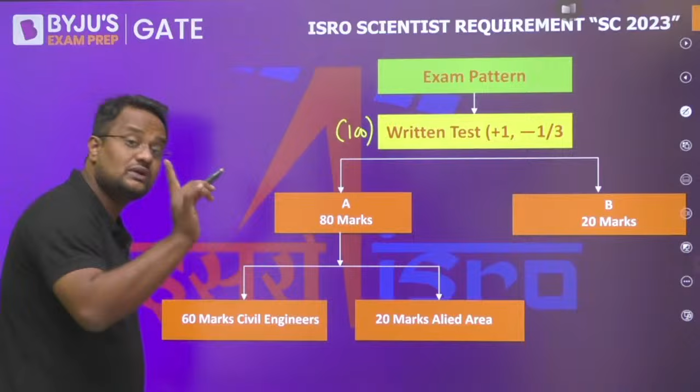Many students are having a doubt - they have asked me in the comment section also. I have replied that maths will also be here. Engineering maths will also be there. That is 75% of 80, which is 60 marks, and 20 marks will be allied - allied means related to civil engineering. So 80 will be distributed as 60 plus 20. This is section A. Then section B will be 20 marks - that will be reasoning, aptitude, logical reasoning, all these questions. You have to individually clear the two sections. Individual cutoff is also there, that is written in the notification.

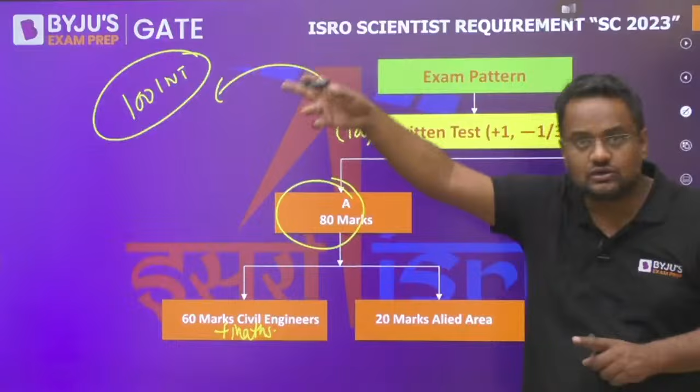After this written exam, there will be a 100 marks interview. Some students will go to the interview - for one seat, approximately 10 to 12 students. Now the final cutoff - this is not like BARC. In BARC, this is just a qualifying exam and all selection is done on interview. Here, after the written test, some students will be selected for interview. While making the merit, there's an individual cutoff for Part A and Part B as written in the notification. For the final selection also, the individual cutoff of written test and interview is there. 50% weightage of written and 50% interview will be taken, plus 1 minus 1 by 3.

Now if I tell you about these 80 marks - out of the previous year questions, not these 80 marks, because the previous year the pattern was a bit different. Previously, don't consider these 80 marks here, because earlier the pattern was different. You can see the distribution of subjects, just see the ratio.

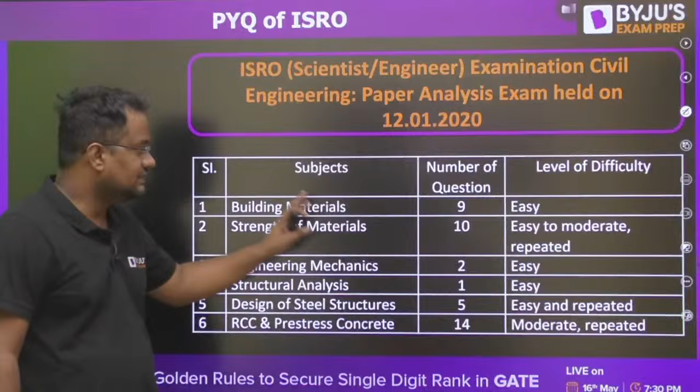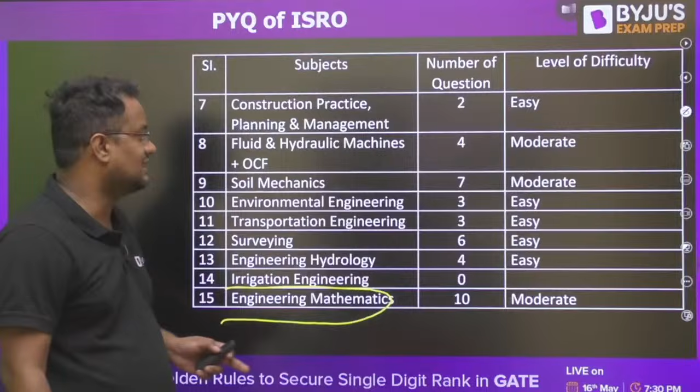Okay, no Saksham, right now there is no test series, but engineering services will be quite relatable to that. So this is the ratio. Strength of material, RCC and pre-stress are asked in high weightage. Now guys, soil mechanics also has decent weightage, environment less weightage here. Engineering mathematics again. So you can see that strength of material, RCC, these structure subjects are having a little bit more weightage, and soil mechanics.

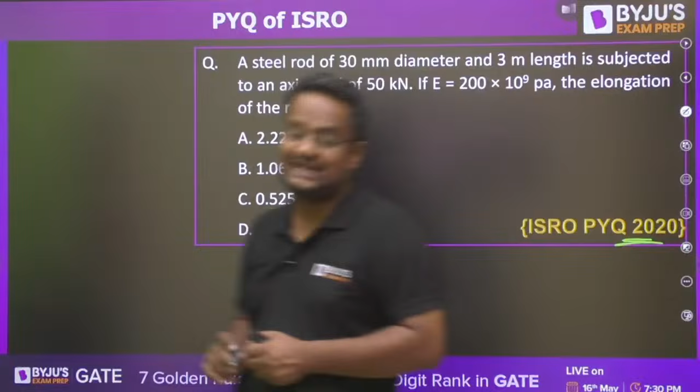Now let us go to the question, guys. ISRO previous year questions 2020 and 2018 we will be doing today.

Okay, Ambati, kaise ho? Every time in the session you say this, na? So quickly tell me the answer in the comment box, guys.

This is question number 1. PYQ of ISRO SOM. This is for civil and mechanical both. Strength of materials. Tell me in the comment box, everyone. Come on, yaar. Macha do, bhai. Easy questions are there, yaar.

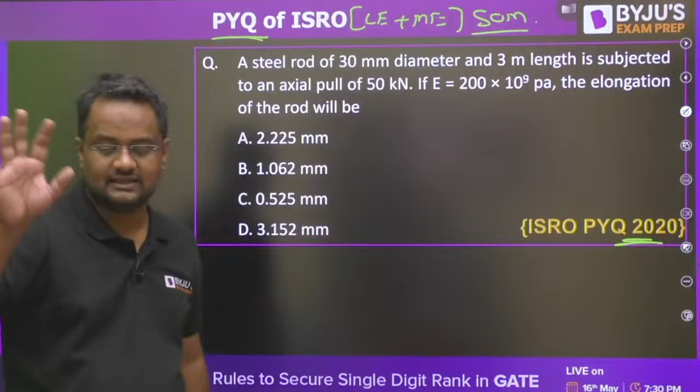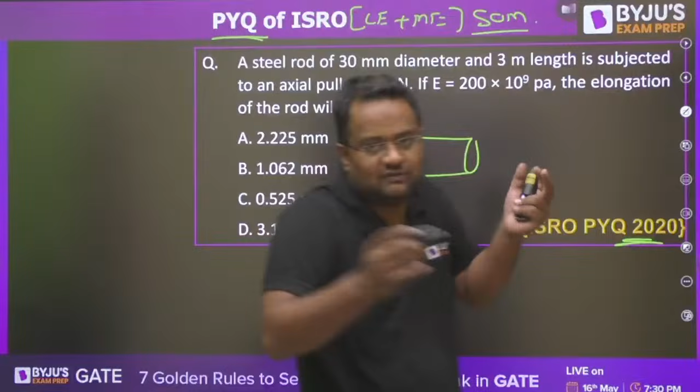I told you the level of the question is much lesser than the GATE exam. Vinay, please take your calculators also. So steel rod, very simple. Now you cannot say that we are doing very easy questions, guys. Whatever PYQs are there, we will be doing. We just want to tell you the level of the exam.

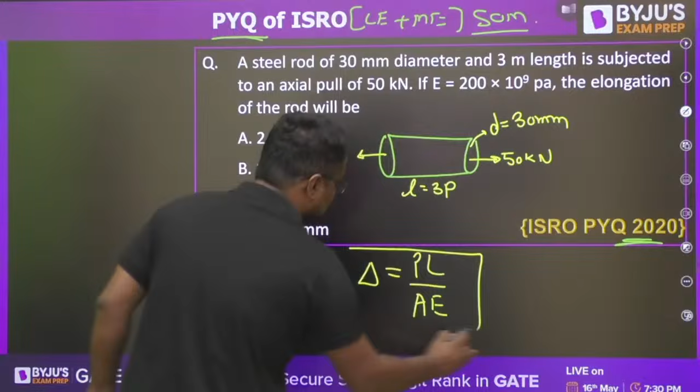30 mm diameter, 3 meter length. The diameter is 30 mm and length is equal to 3 meter. An axial pull of 50 kilonewton is there. Young's modulus is given. So delta is equal to PL by AE. Force, length, A and E, everything is given. So 1.062 will be the answer. These kinds of questions are asked in ISRO, and the same level is expected in the state service examinations. Okay, now moving to question number 2.

The shape of the bending moment diagram over the length of the beam carrying a uniformly increasing load is always? What is uniformly increasing load? Tell me, yaar.

Yes, Vinod. ISRO exam most probably will be offline. Tell me.

Uniformly increasing means, whatever the beam is, it's not given, simply supported or cantilever, I don't know. Increasing uniformly, that means linear. Otherwise the increase can be parabolic also. Now if the loading diagram is of n degree, then the SFD will be n plus 1 and the BMD will be n plus 2.

How do we know this? Because the bending moment slope is shear force, V. So after differentiation, degree is reduced by 1. X cube differentiated is 3x square. So if this is n plus 2, this will be n plus 1. And shear force differentiated is load intensity. So this is n plus 1; differentiating, it will be 1 less.

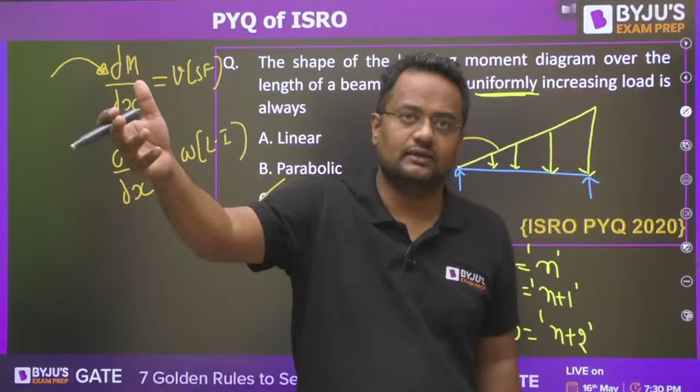Now I am again saying, guys, the level of ISRO PYQs is much lesser than GATE. It is up to ESE objective and SSC exams. Now tell me, Hooke's law is valid up to? Everyone.

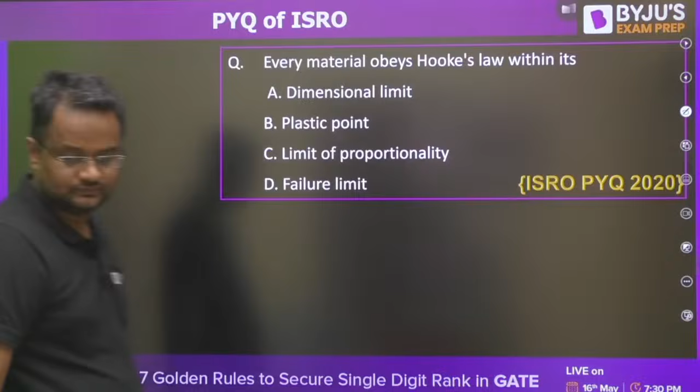It is up to the limit of proportionality. Okay, Hooke's law is sigma is proportional to strain, so sigma is equal to E epsilon, like this. Now this is y-axis stress, this is some constant m, this is x. So Hooke's law is suggesting a linear relationship, and linear is only up to the proportional limit.

Hooke's law is this: y is equal to some m into x, not sigma square, not epsilon cube. So Hooke's law is suggesting a proportional thing, that is up to the linear limit. "But elastic limit is the appropriate option, sir, I think."

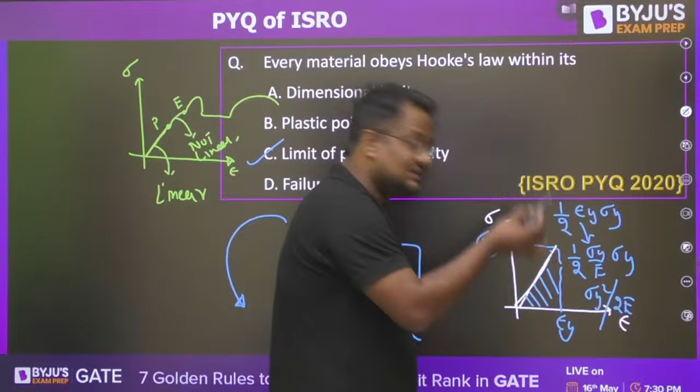So we do this. Otherwise, up to elastic limit, if we are finding the area, this is not sigma y, this will be something else. Hooke's law will not be valid. Epsilon y you can't write as sigma y by E, but that is just an assumption. Okay? Got it?

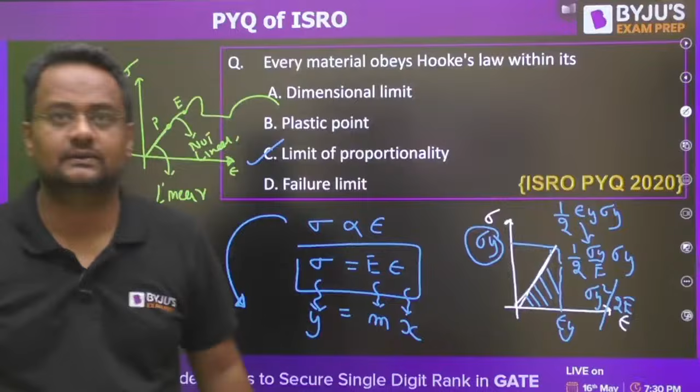Okay. Now next question. The unit of moment of inertia of an area is? Let me check who can give it faster. Okay, everyone, every commando, every champion, come on. Everyone's answer I want. Great.

So guys, I is equal to BD cube by 12 or pi d4 by 64. All these are dimension to the power 4, meter to the power 4. Okay, yes. Do this now.

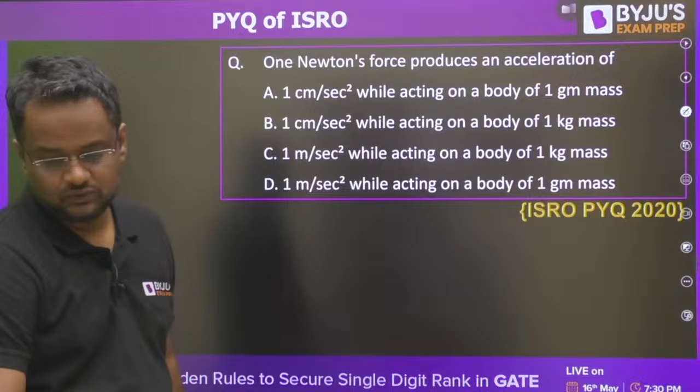1 Newton, guys, force is equal to mass into acceleration. Force is equal to mass into acceleration, and this is an SI unit, Newton. So this should also be SI. Mass will be SI unit kg. Acceleration will be meter per second square. So 1 Newton is 1 kg into 1 meter per second square. Okay, like this.

Okay, guys, can you please write down your cities, in which city you are right now? I'm right now in Delhi. I'm basically from Uttarakhand. My hometown is Uttarakhand, but right now I'm in Delhi. Can you all write down? We all are meeting on a beautiful Sunday morning.

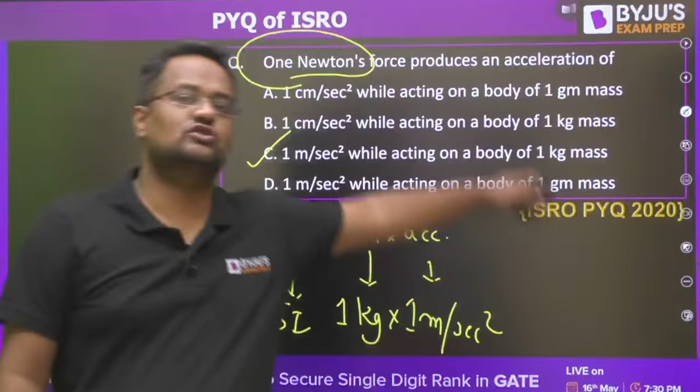We'll be devoting some time to the ISRO PYQs of SOM. This is for civil and mechanical both. Right now, these are the PYQs of civil, but it is equally important for mechanical as well.

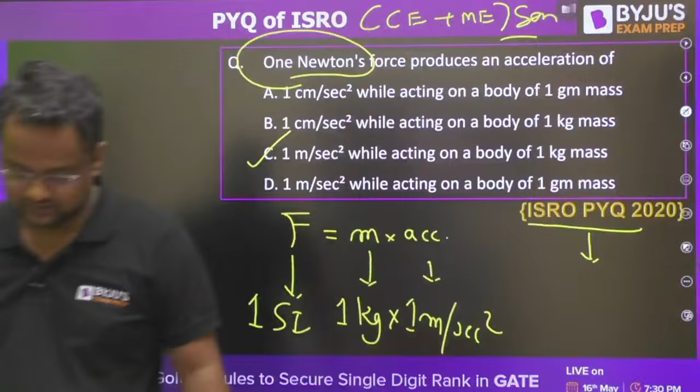Telangana, Andhra Pradesh, Telangana, okay. Karnataka. So in Karnataka Congress has won, huh? Swati, Congress won there with a very good number of seats, although the vote percentage of BJP increased.

Kadapa. What is Kadapa, yaar? Kadapa is some name of any chief minister or the potential candidate for chief minister. Okay, Kadappa. Kadappa is also that in Bahubali also, na? Someone is Kadappa. I have not seen the movie. Okay, I don't watch movies.

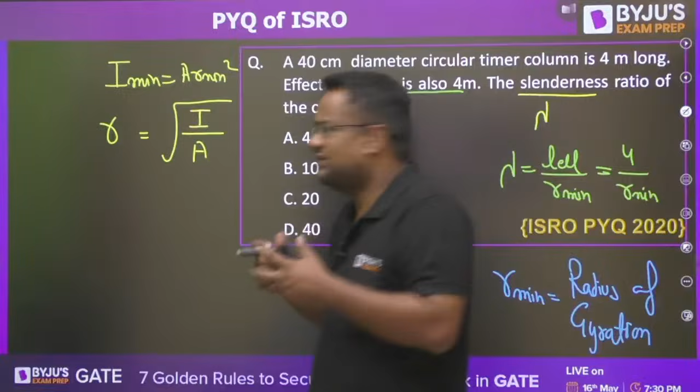What is the physical meaning of radius of gyration and lambda? We all know this formula. If lambda is more, that column will be long, and a long column is more liable for buckling failure. Lambda more means buckling failure more. Short column means crushing. Short column will not buckle like this; it will more probably be crushed. Long column may buckle. So lambda signifies the failure of an object. Usually for steel, if lambda is more than 88, in the range of 100, 120, 140, the site engineer understands there is a chance of buckling failure.

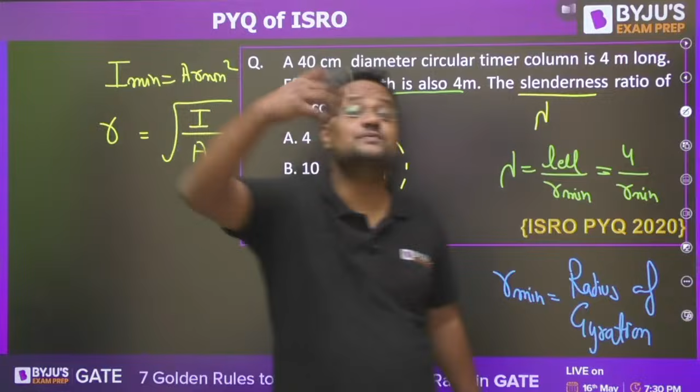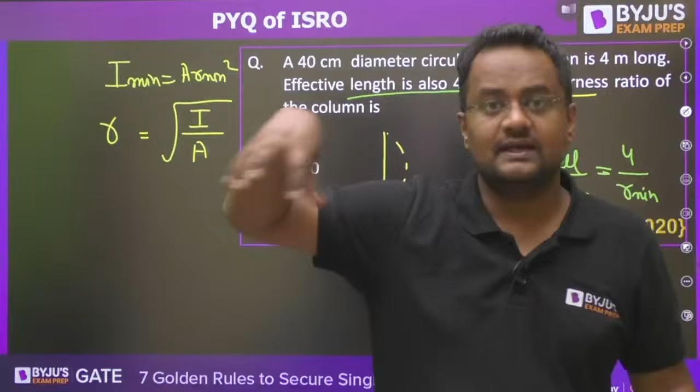What is the physical meaning of R? Here R depends only on shape, I and A, not material. If R of a particular shape is more, it provides more moment of inertia for a particular area. Suppose this is the area. From this much sheet, I can make an I section, a circular section, or a rectangular section. From all those sections, where R is more, it provides greater moment of inertia for the same area. So R more means more strong.

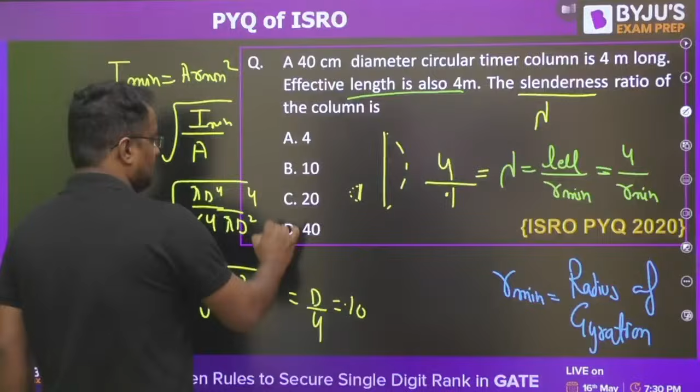Okay, so what is I here? Diameter. It is circular, so I will be the same about all axes. About the central axis, it is pi d^4 by 64, and area is pi d^2 by 4. So pi cancels, R is under root d^2 by 16, so it is d by 4. Diameter is 40 centimeter, so this is 10 centimeter, which means 0.1 meter. L is 4 meter, so 4 by 0.1, this will be 40. Have you got it? Everyone, please let me know.

SOM PYQ we are doing, guys, for both civil and mechanical. Okay. Let us go further now.

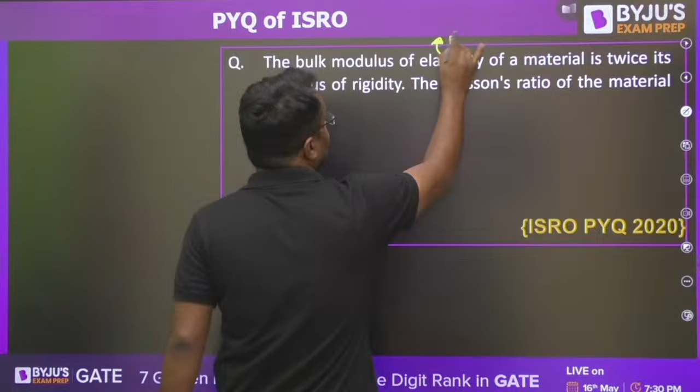The bulk modulus of elasticity, K, is twice the modulus of rigidity, which I am representing as G. Somebody represents it with other notations also. So modulus of elasticity is twice its modulus of rigidity: K is equal to 2G. This is given. Okay, Anwar, we'll do that, don't worry. K is equal to 2G.

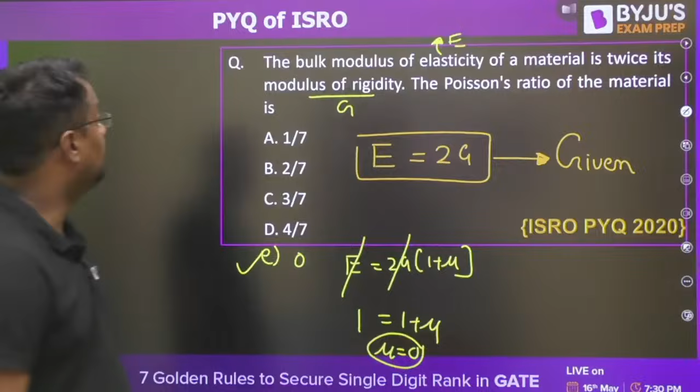Poisson ratio of the material: E is equal to 2G(1 plus mu). This is the relationship. But E is itself 2G, so 1 is equal to 1 plus mu, so mu is equal to 0. No option. Okay, sorry, bulk modulus of elasticity. We have done this mistake. This is bulk modulus here, K. So actually we have done two questions here. So this is K.

Okay. So relation between K and G is, see, E, Young's modulus, is equal to 3K(1 minus 2 mu), correct? Okay, and K and G also have some relation, na? Mu is equal to, I guess, what was the relation? I forgot. 3K minus 2G upon 6K plus 2G. This was the relation. Check this.

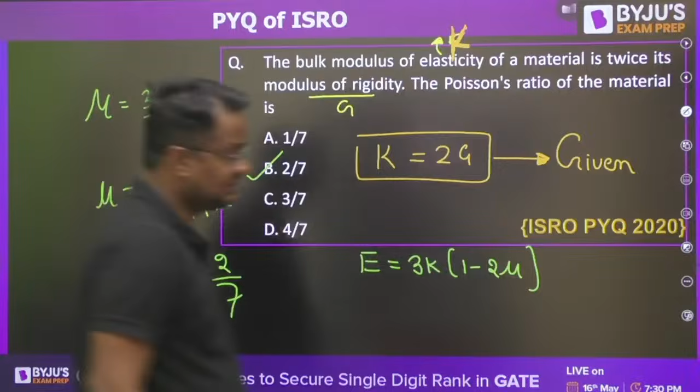The bulk modulus of elasticity, check this. Is this fine? The bulk modulus K is equal to 2G. If this is fine. Okay, I will not remember the formulas na. 3K minus 2G, 2G is K itself, upon 6K plus K. So mu is equal to 2 by 7. This is B option. Please check. Okay. So this is not required here.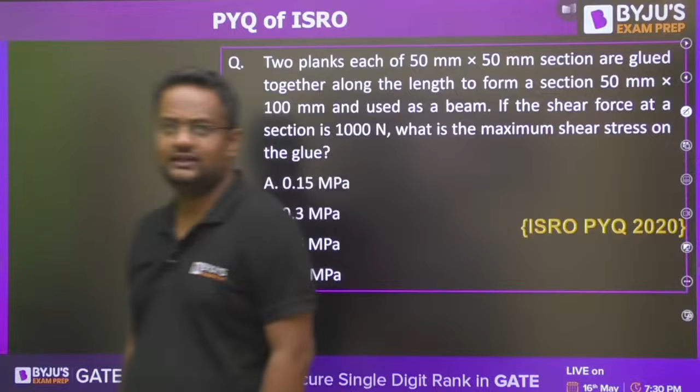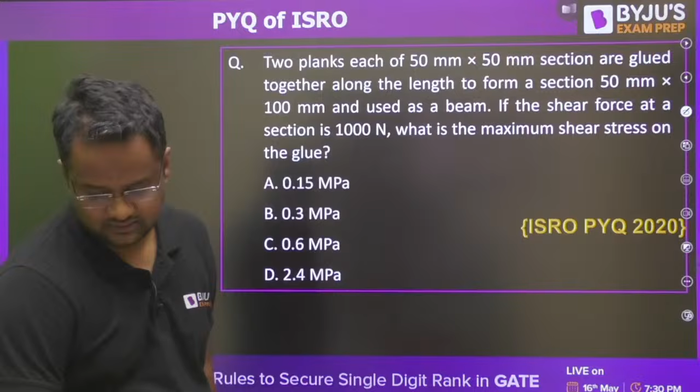Let us do the next question. Let me check which student can do it fastest from which city. Tell me. Everyone out there. Which city will be giving the fastest answer? Let me check. Keep sharing, guys.

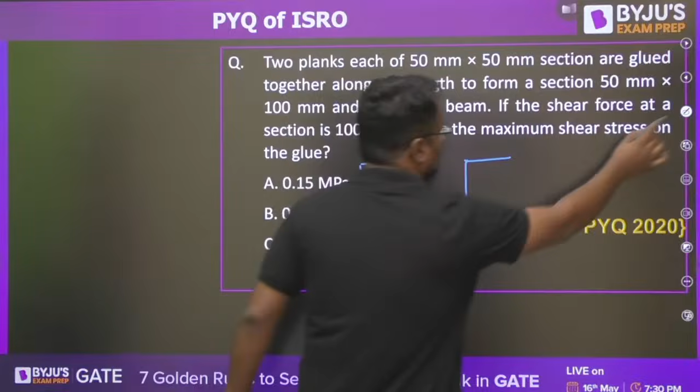2 planks, each of 50 into 50. This is 50 into 50. Nice question. And one is also 50 into 50. Now they are joined by a glue. They come closer to each other and are joined by glue. Fevicol. So now they become a single assembly, like this. Now, they have not asked maximum shear stress. They asked maximum shear stress on the glue.

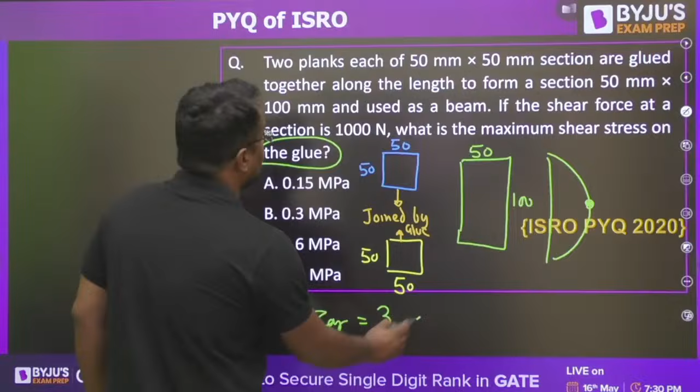So here the maximum shear stress occurs at the center, na? And this glue will also be at the center, such that these dimensions are joined in such a way. So tau max is equal to 3 by 2 tau average, because the glue itself is in the location of maximum shear stress. So 3 by 2 tau average, where did it go? 1000 by area. Area is 5000. Oh, very easy question. And the answer will be 0.3 megapascal.

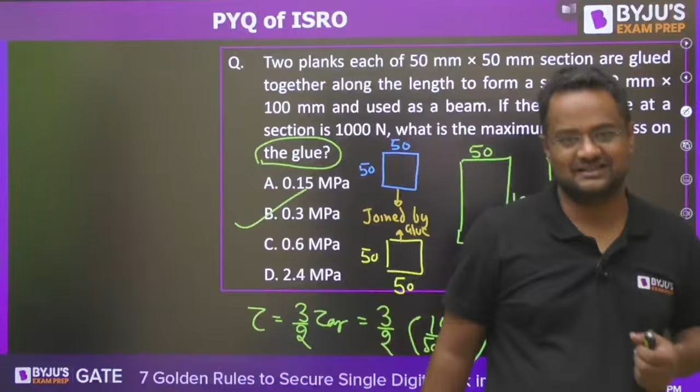Okay. Anubhav Singh, the name itself suggests someone who clears the civil service examination. In the civil service examination, most names are like this, na? Not these years, but in my time, 2013-14, when I was in IIT, the names of the civil services toppers were like Vikram Pratap Singh, Rajwardhan Singh Rathod. I know Rajyavardhan Singh Rathore is a silver medalist in Olympics, but still. Anubhav Rathod, Vikram Khandelwal, Jograj Singh. These are the names of civil service aspirants.

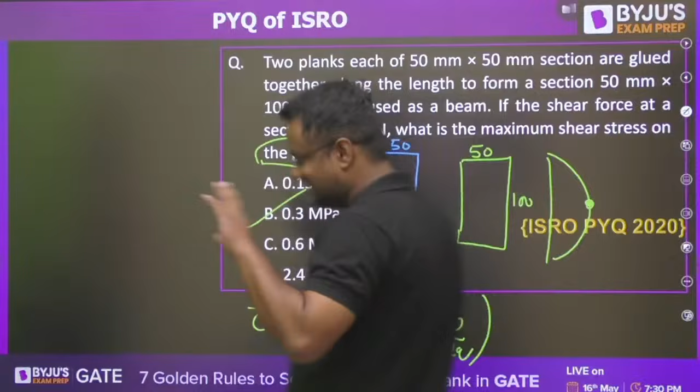All these, Reddy, all these are toppers of IIT, and Singh, all these are the toppers of the civil service examination. Okay. Now moving further.

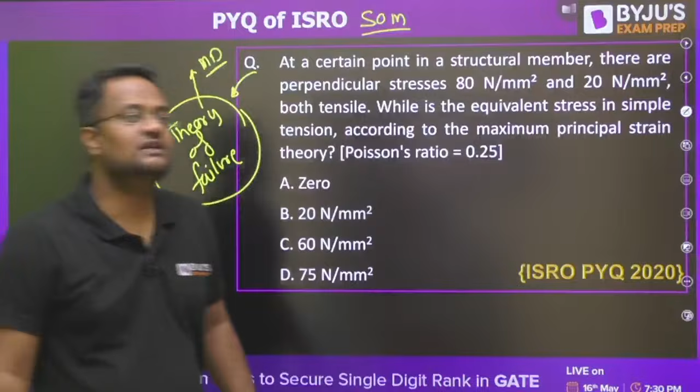At a certain point in a structural member, this is a PYQ of SOM. This particular question is on theory of failures. Theory of failure, mechanical engineers study this completely in machine design. But for civil engineers, as per the current syllabus, this is not in the GATE syllabus, it is only in the engineering services syllabus. Okay?

Now, theory of failure, which is not in the GATE syllabus of civil engineering but in the syllabus of engineering services: the stresses are 80 and 20. What should be the equivalent stress in simple tension? See, the stresses are 80 and 20.

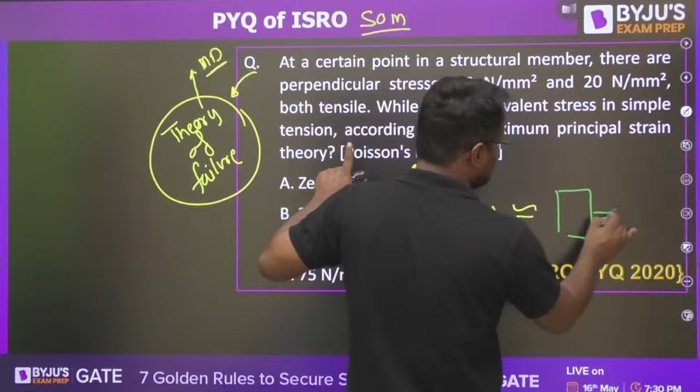80 and 20. Now what are they saying? Equivalent stress according to maximum principal strain theory. What is the equivalent stress? This sigma equivalent. So equivalent stress means it will produce the same strain as per the strain theory. What will the strain be here? Sigma equivalent by Young's modulus. And what is the strain here for this yellow one? 80 by Young's modulus minus mu into 20 by Young's modulus.

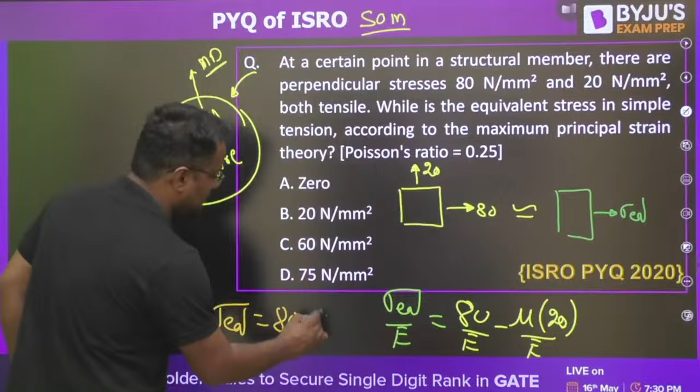Okay. So E will be cancelled. So sigma equivalent is 80 minus mu, where mu is 0.25, into 20. So this will be 75.

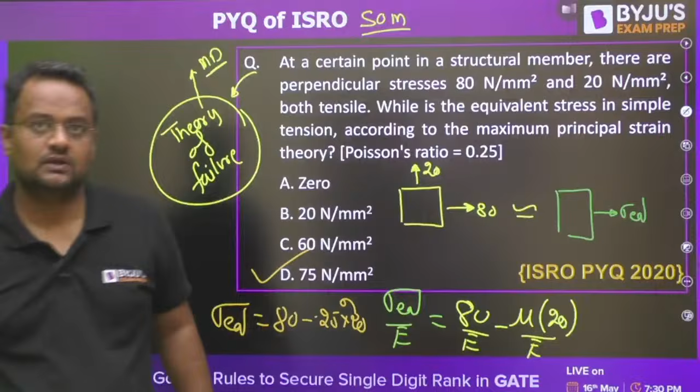Now 2020. Two simply supported beams are made up of same material and are of same cross section. Both beams carry uniformly distributed load of equal intensities. One beam is 2 meter long, another is 4 meter long. The 2 meter long beam shows a central deflection of 1 mm. What is the central deflection of the 4 meter beam?

Okay. So one beam is like this. Both are simply supported beams having this W intensity, and what is the length? 2 meter long. And here the deflection is occurring like this, and the central deflection is 1 mm. Delta is equal to 1 mm.

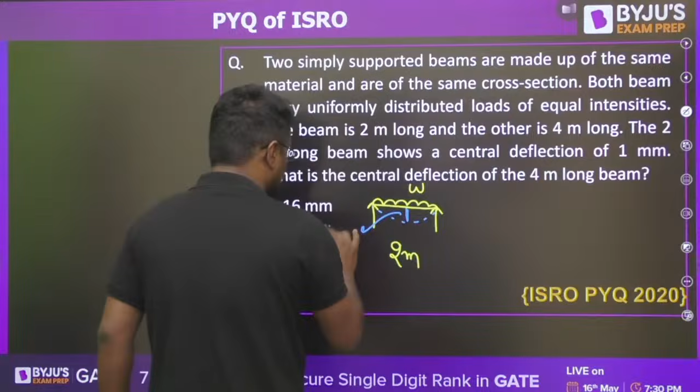Okay, now what is happening? Another beam is also of same dimension. Everything is same, but length is doubled. This is also W intensity. It is 4 meter long. Now what is the delta there? This delta is question mark. This is asked in the examination, everyone.

Now as you know, delta is equal to, what is the formula? 5 by 384 WL^4 by EI. So delta is proportional to L to the power 4. So delta there upon 1 mm is proportional to L to the power 4. One beam is 2 meter long, another is 4 meter long. So it is 4 to the power 4.

So what is the ratio? 4 to the power 4 by 2 to the power 4. So it is how much? It is 16. This ratio is 16. So delta will be 16. A option. Yes, it is proportional to L to the power 4. Every other thing will be cancelled out.

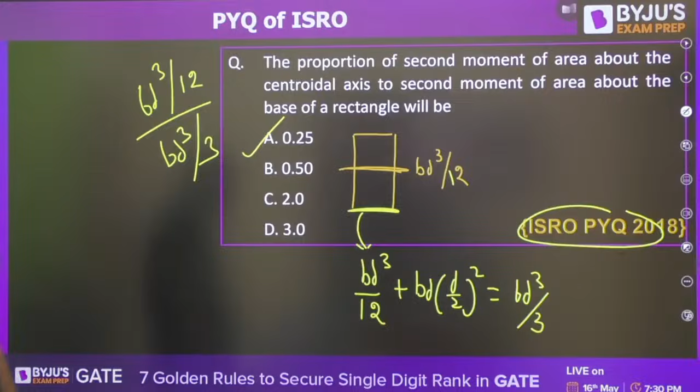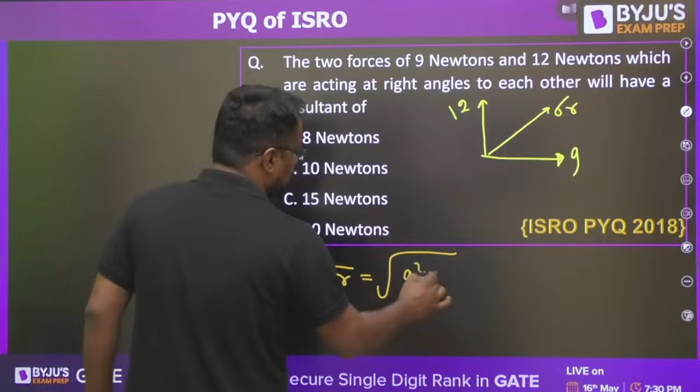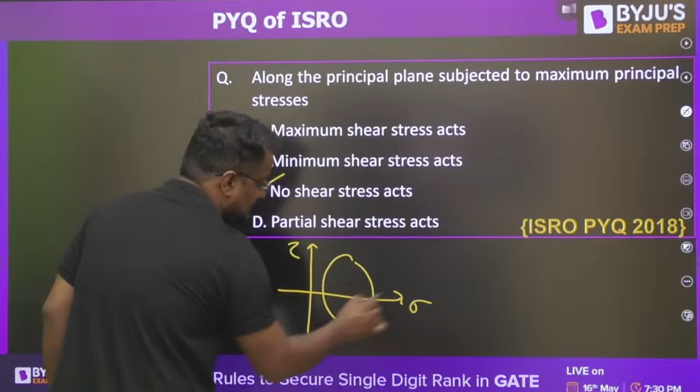Suppose when principal stresses are maximum, shear stress is 0. When shear stress is maximum, principal stress may or may not be 0. For this case, when shear stress is 0, here the x-axis is 0, but not necessarily here. But whenever principal stress is maximum or minimum, shear stress will be 0.

It is like when a boy is topping the class, first in the class, no girlfriend, 100%.

But when a girl becomes topper, girls are very hardworking. When girls are topper, there may or may not be a boyfriend, okay? After 2 or 3 months here.

Okay, got it friends? Enjoying the session? Okay okay okay, keep sharing.

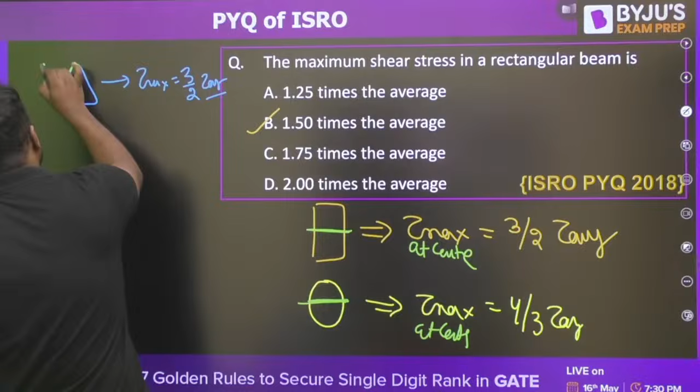Now where does this maximum shear stress lie? For symmetrical bodies, the maximum shear stress is at the center, at d by 2, right here. For symmetrical bodies, maximum shear stress lies exactly at the center. So where does it lie here? At h by 2. H by 2 is not the centroid here. Tau max lies at the centroid.

But for unsymmetrical section, it is not at the centroid. Centroid is 2h by 3, or from base it is h by 3. It is h by 2 there.

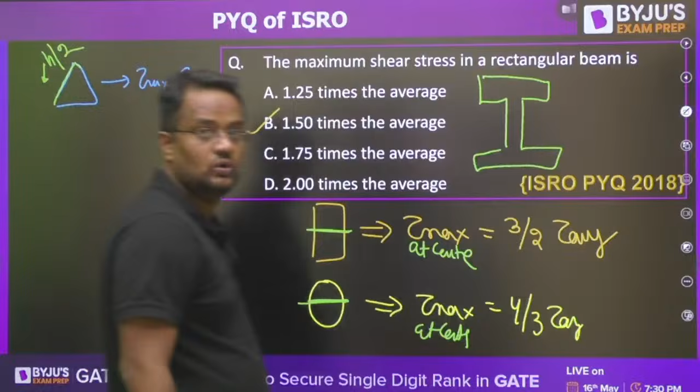Now for I section, where is the shear stress maximum? Tell me, for I section, where is the shear stress maximum? It is again symmetrical, na? So for all symmetrical sections, what did I tell you? The shear stress is maximum at the centroid.

So here the shear stress is like this, again maximum at the centroid. Got it? And this is the shear stress at web, and this is the shear stress at flange.

Now what is tau 2 by tau 1? It is B by b. B is this one and small b is this one. Tau 2 is at less area, therefore stress is more. Tau 1 is in the area of flange, more area, therefore stress is less. So as we are going down, suddenly area decreases, so stress suddenly increases.

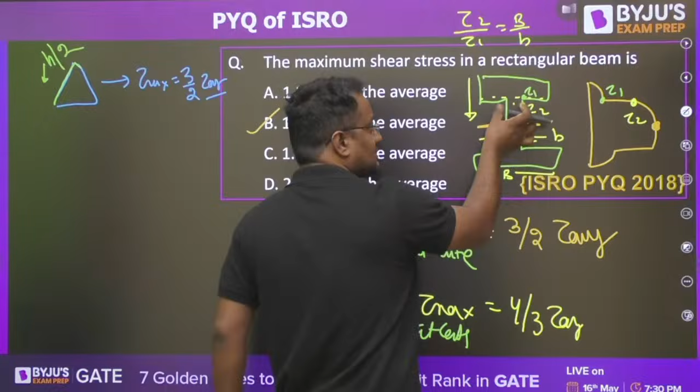Got it? Do this: a cantilever beam A. So this is a cantilever beam A, subjected to concentrated load at the free end.

Okay, now what happened to the other? B is a cantilever beam with twice those dimensions. So here it is B, and dimensions are twice, subjected to the same load P.

Then the deflection of B with respect to A, delta B with respect to A, is to be found out. Now what is the deflection of a cantilever?

PL cube by 3EI. Load is not changing, length is not changing, only width and depth they have asked - width and depth, not the length. So E is not changing, only I. So delta is proportional to 1 by I.

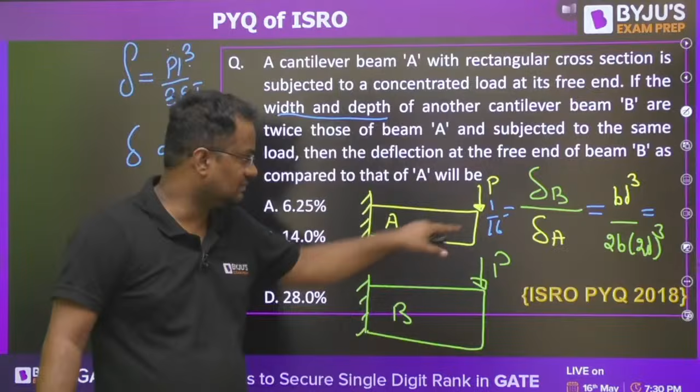Okay, so the deflection of the free end of A will be... 1 by 16 is how much percent? If there the deflection is x, here it is x by 16. So the percentage is x by 16 of x into 100, that is 100 by 16, that is 6 point something. Got it?

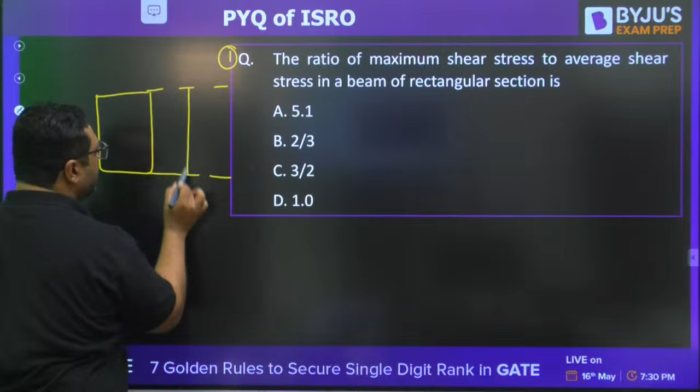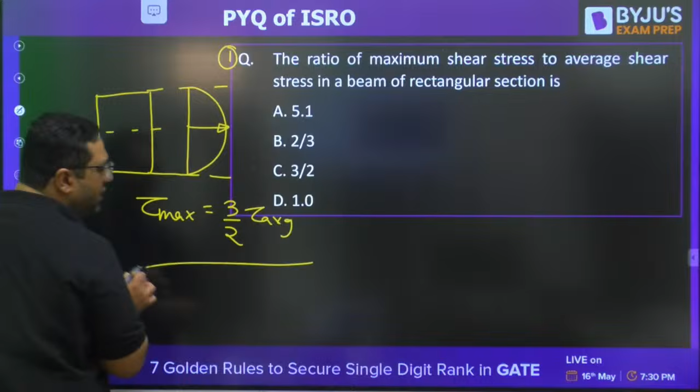So whenever we talk about a rectangular cross section and make the shear stress distribution, this type of distribution comes. This is the neutral axis and this is the maximum shear. You know the maximum shear comes out to be 3 by 2 times tau average. So they have asked the ratio, and the answer is going to be 3 by 2. It is an easy question, but it is a PYQ, I have not made it up for you.

This is the second question from SFD BMD. Here they are asking about the bending moment, and I hope everyone would find the bending moment maximum at the midspan. Guys, they have given a UDL for half of the length. So first step will be to find out the support reactions RA and RC. First find RA and RC, and then you'll be able to find the maximum bending moment at B. Just try to solve it, I'll give you time for that.

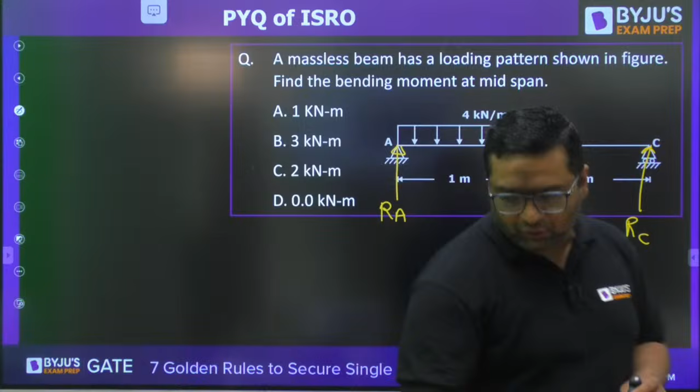You guys are doing extremely well. If you do the same in all subjects, you are going to get very good ranks. These are special vacancies - the original ones every year give are still yet to come. So try to solve this question, guys.

Solve this question. Okay, Anubhav Singh has given the answer as 1 kilonewton meter. What about others?

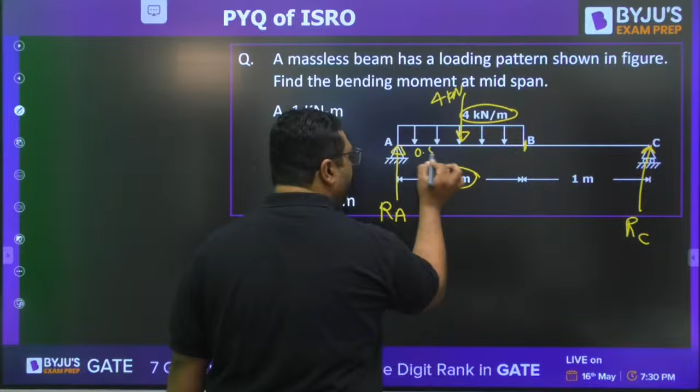So guys, first we will go for the support reaction calculation. This UDL is 4 kilonewton per meter acting for 1 meter, so we can assume a total load of 4 kilonewton at the midspan. The midspan is 0.5 meter from the left hand side support and 0.5 meter from here. Now if you want to find RA and RC, you can apply the shortcut. RA will be written as 4 into 1.5 by total length.

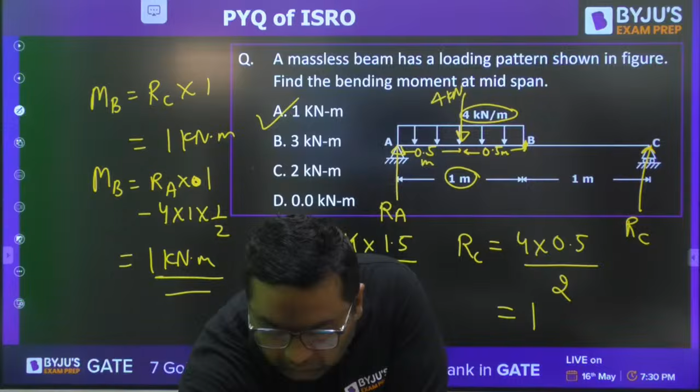The answer for this is going to be 1. Now moving to the next question. A steel machine element at the critical section is subjected to a biaxial state of stress, where the two principal stresses given are 300 and 300, both equal in magnitude. Find the von Mises stress.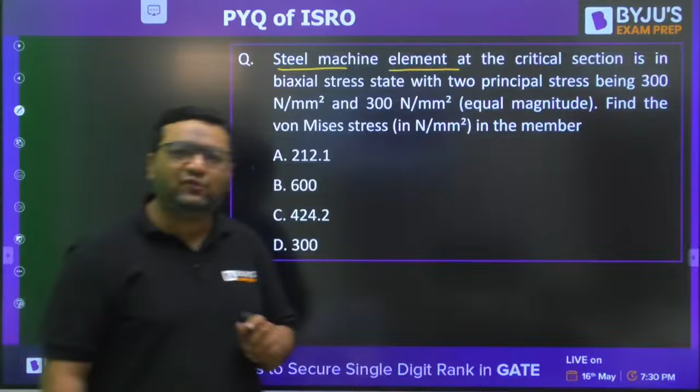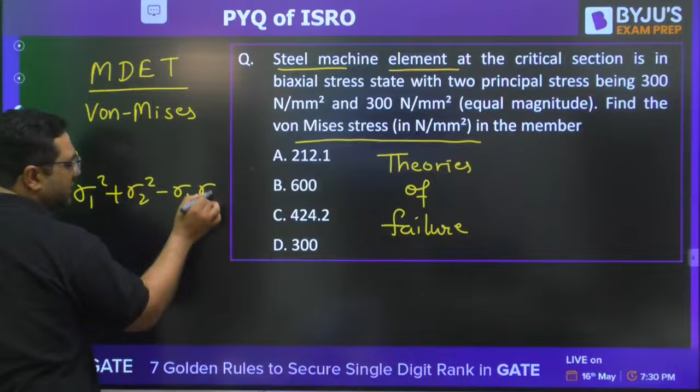This question is from theories of failure. This topic is in the syllabus of machine design for mechanical and strength of materials for civil students. If you see the von Mises theory, it is also known as the maximum distortion energy theory. The von Mises stress is found as the square root of sigma 1 squared plus sigma 2 squared minus sigma 1 times sigma 2, which gives the equivalent stress, called the von Mises stress.

So when you find this, sigma 1 equals 300, sigma 2 also equals 300. Just put these values and get the value of SE. Yes, anybody, please tell me what will be the value.

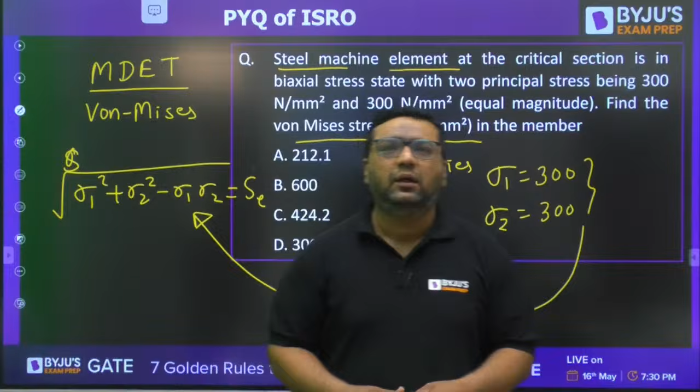Yes, the answer for this question will be D. When you put the value 300 all the times, you get 300 squared plus 300 squared minus 300 squared, the answer will be 300. So D is the right answer.

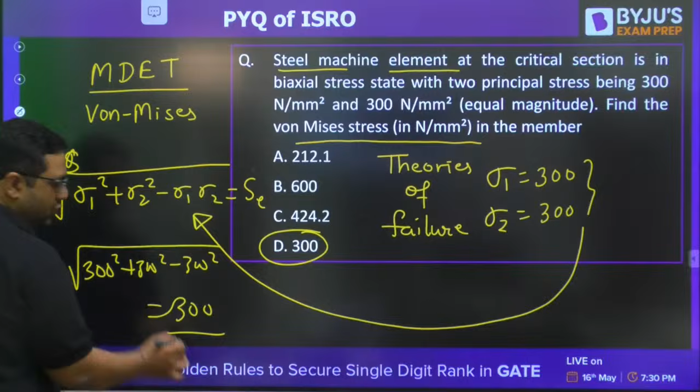Next question: a cylindrical pressure vessel has a diameter of 200 mm, and the thickness is 2 mm. You need to find the hoop stress and the axial stress. Axial or longitudinal are the same here. So you need to find these two values, and the pressure is mentioned to be 5 MPa.

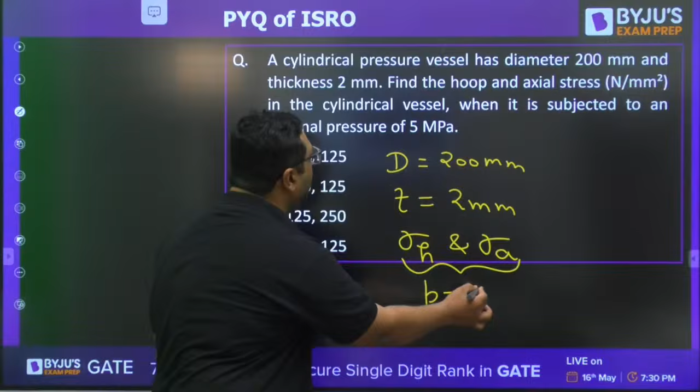Let us see how many of you remember the formula for hoop stress or circumferential stress and axial or longitudinal stress. Longitudinal stress is 1/2 of the circumferential stress. Just solve it and let us see how many of you give the right answer. Anubhav, Pajel, please tell me, and do like and share the session guys.

Thanks guys, okay, what will be the answer? Giving you the hint for those who forget the formula: hoop stress is PR by T or PD by 2T, and axial stress is simply PR by 2T or PD by 4T. This is from thin pressure vessel. Let us see how many of you give the right answer.

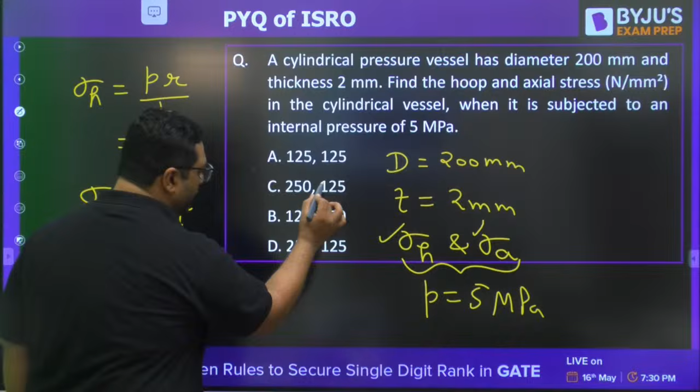Pajel is saying D is the answer, 250 and 125. Yes, here there is a mistake actually, this should be 250 and 500. This option has a mistake, so 250, 125 you are saying, Pajel. What about others?

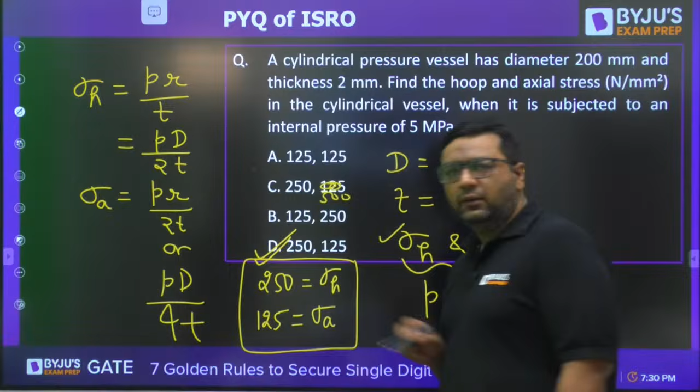So the answer for this is D, 250 and 125. 250 is the hoop stress and 125 is the axial or longitudinal stress. Okay, very good.